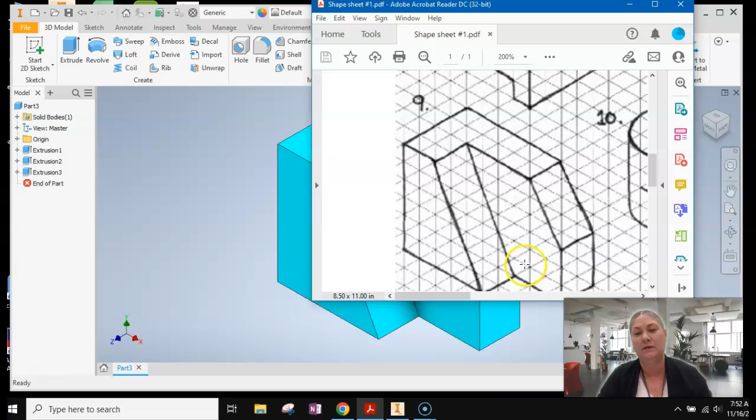Today we're looking at Autodesk Inventor Shape sheet number 1 and shape number 9. We'll make a simple approach: make this rectangle, cut off this edge, and add this on top. Super simple part, 1/2 inch for each box, looks like 8 by 6, so 4 by 3. In order to make this part from the home screen, say new part, new sketch, top left, choose the XY plane, have it coming at us.

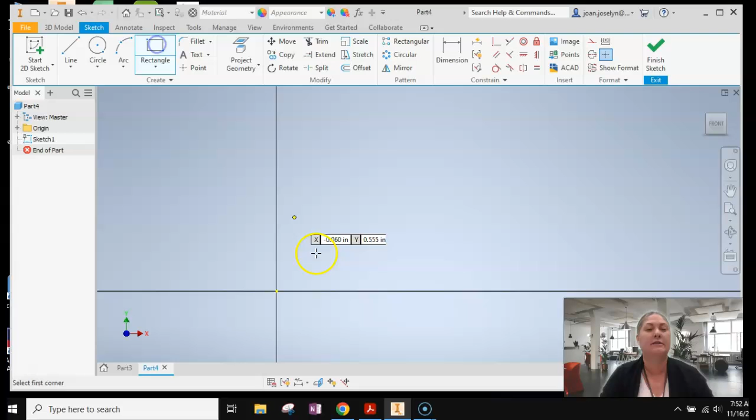I'm going to use the pan tool, F2 on your function keyboard, escape, and then rectangle tool. Hit the origin, make sure you see that green dot, and say 4 inches, tab, 3 inches, enter. If I hit front, it'll bring it in front of me better. Let's finish the sketch, hit the house so you can see it better. Extrude it 1 inch, it can come forward.

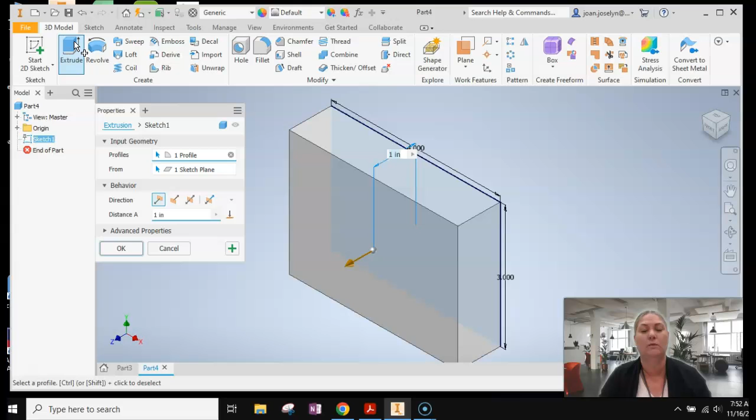That's perfectly fine. Let's cut off that edge there. We're going to start a new sketch right on the front of this object. I'm going to use my pan tool, F2, to bring it over, escape to get out of it. In order to cut this piece out right here, we need to make the entire shape over here and then cut it. I'll show you what I mean.

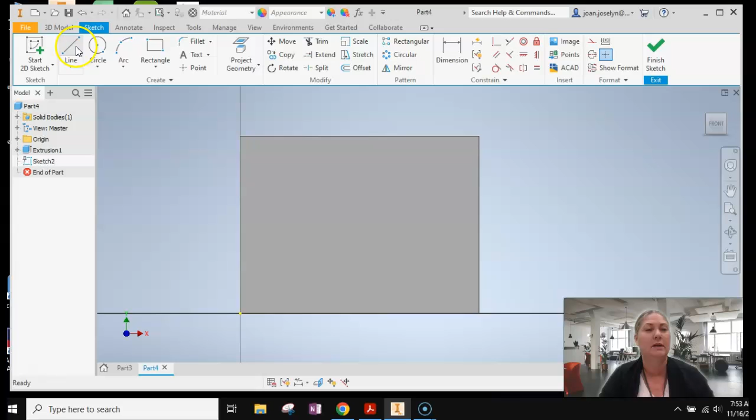We're going to use a line tool, and I'm going to start at this corner. Make sure you hit the corner, you'll see it get bold, you'll see the dot turn green. Left click, drag to the left, and it looked like it was 1 inch away from the edge there. Let me just double check my numbers. I'm going to hit escape and get out of the line tool. It looked like it's 2 boxes away from that point, and this is 1.5 boxes up.

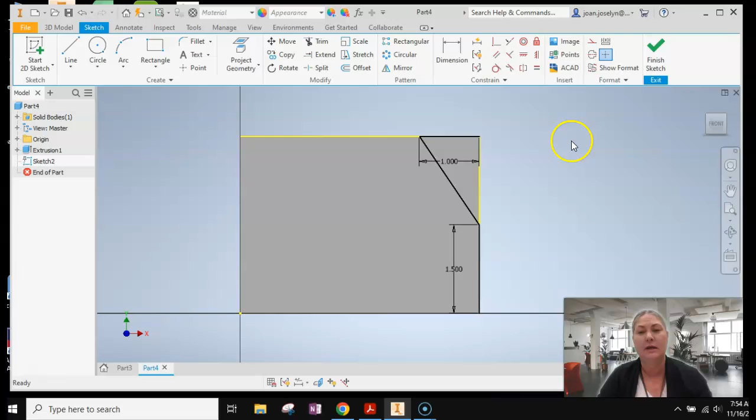So line tool again, go to the bottom here, go straight up, make sure you're straight 90 degrees, and it's 1.5 inches. Now I'm still in the line tool, so I'm just going to connect where I left off right here to the edge here. That's what I want to cut out, but if I closed it now and cut it out, it can't see this yellow. If it's not black, then your extrusion cannot see it.

I need a closed shape. I'm going to move that out of the way so you can see what I mean. I need this triangle to be solid, so I'm going to get the line tool and go from the dot to the dot. You see how it turned black? That means I've got a closed loop here, I can extrude that out. Didn't really need this line except that it told me where to place it.

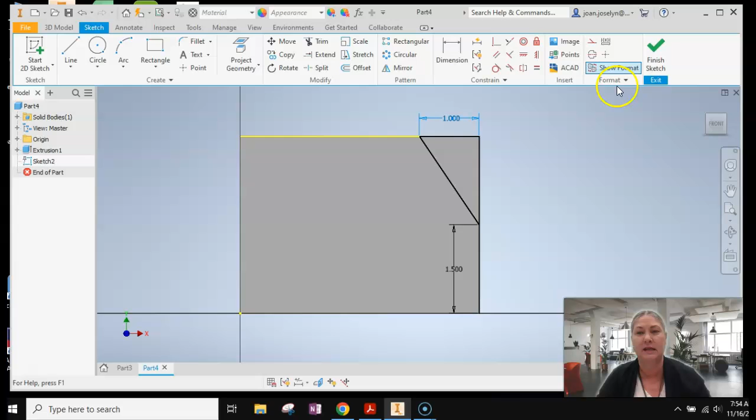So escape, finish the sketch, extrude, and we want to flip or cut. Make sure that it's see-through right here, right? So you could just drag it all the way through. Hit OK, that's done.

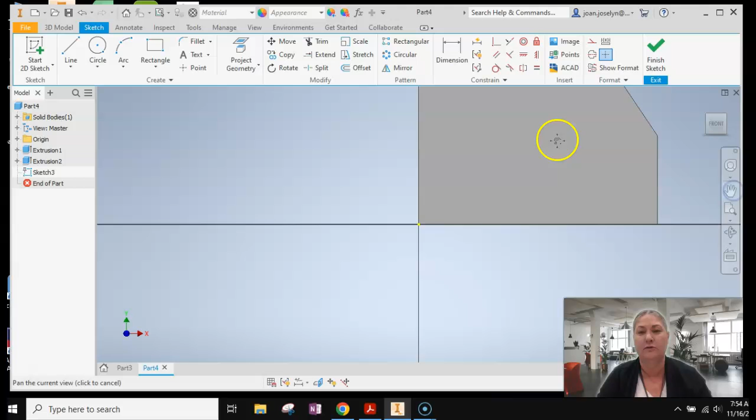New sketch on the front face. Again, I need to create a closed structure, so I'm going to do the line tool. Hit the origin and go straight up, bottom to top, 3 inches. That's black, so I know it's closed. All right, let's see how far we got to go: 1 inch this way, 2.5 inches this way.

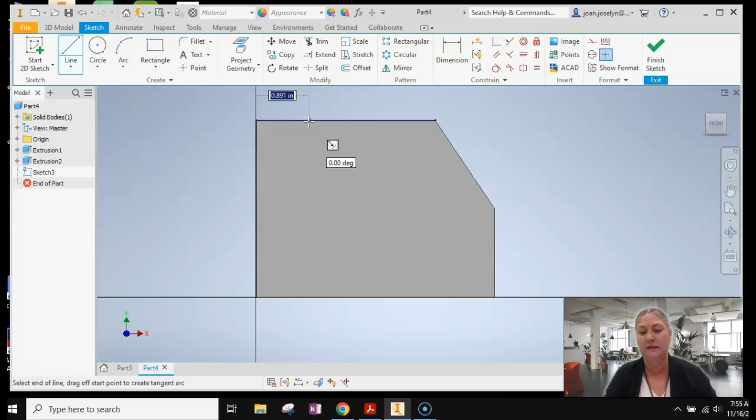So line tool, hit the top left, drag it to the right, make sure you're straight 0 degrees, and I think we said 1 inch. I'm going to escape out of the line tool because I don't know where to bring it down yet. I'm going to get the line tool again, escape and go back into it because it stays where it was, right? I needed it to come down here. So click down here, drag to the right and type in 2.5. It's hard to change it after, so be careful you get it now.

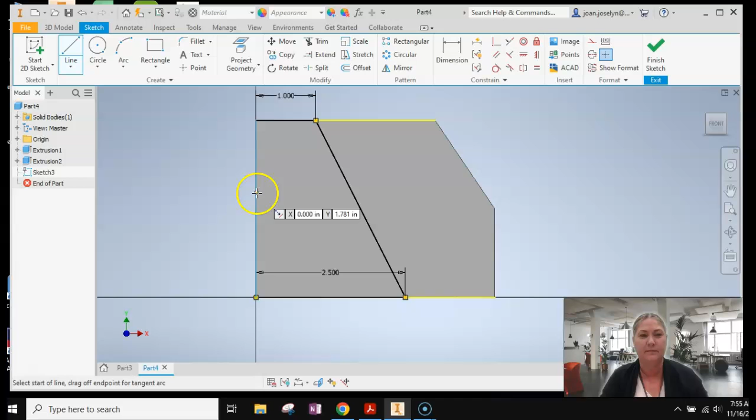Now I'm still in the line tool and it's attached to where I just was, so I'm just going to connect it. Make sure you hit the line, see how everything turned green? Only way you're going to be able to extrude. Okay, so now when I'm done, hit escape. I see 4 black lines, that means I have a closed loop and I can extrude that. If you see yellow in here somewhere, you missed something.

Finish your sketch, hit extrude. It's going to default to your last amount, which was 1. Perfecto. Awesome.